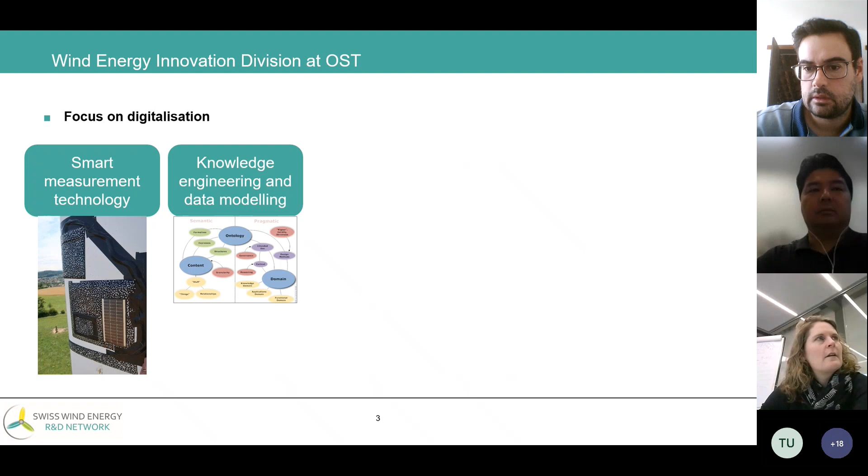And yeah, our main focus, as I said, is on topics of digitalization. So we do things like develop smart measurement technologies. This is a pressure measurement device that we develop. We do lots of work on knowledge engineering and data modeling, so how to structure data in a way that artificial intelligence can use it easily. And we then do lots of data analytics and AI. We have some projects on digital twins and decision support.

And then we're quite into the topic of data sharing and making data FAIR, which means findable, accessible, interoperable, and reusable. And we try to bring together people with data to solve problems. Our research has got to do with flow modeling in mountainous terrain. In Switzerland, we have lots of mountains.

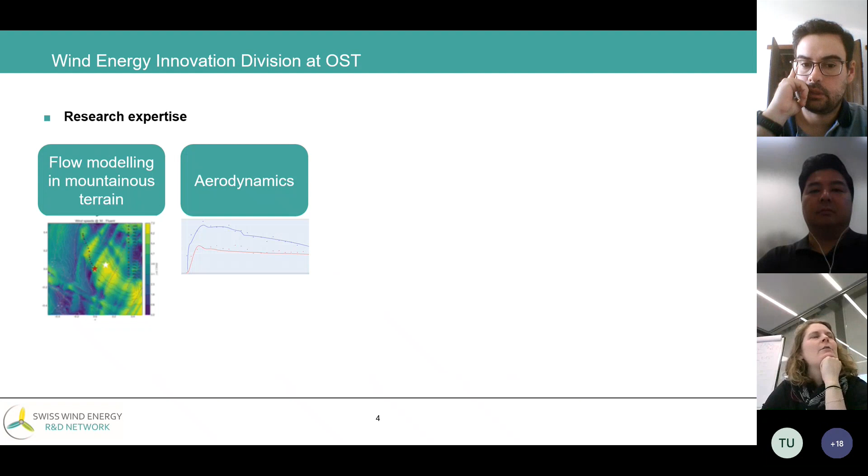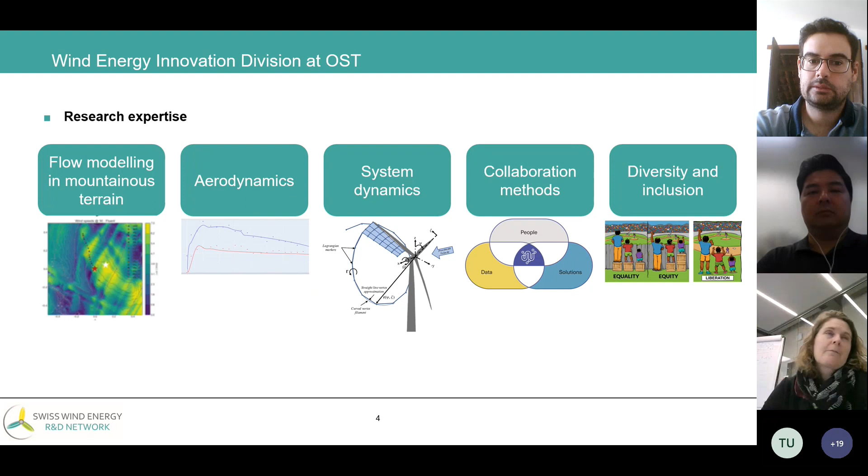We also look at rotor blade aerodynamics with our measurement systems. We've got some projects where we're looking at the dynamics of the whole system. Then we research into different collaboration methods, so a bit with social science, and then we have a diversity and inclusion topic as well, because it's important for us to include lots of different people in research.

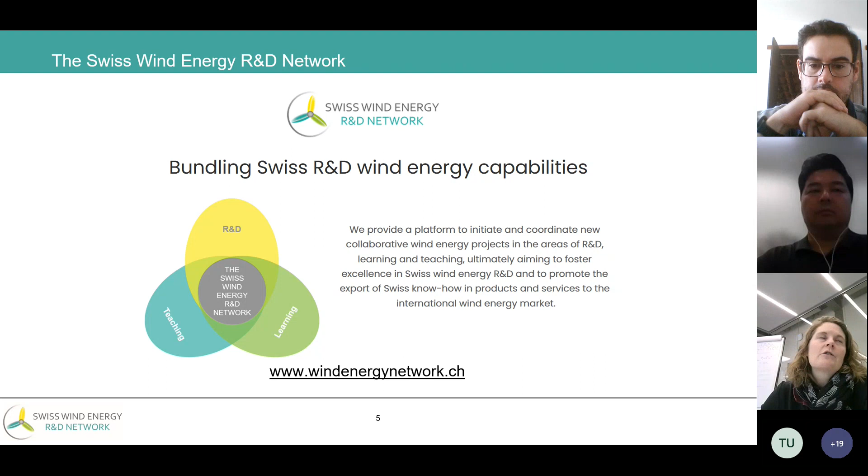And the Swiss Wind Energy R&D Network, you'll have seen that the invitation to this event came on our website. So we're trying to bundle Swiss research and development wind energy capabilities, but we're also trying to promote relationships and collaborations with other countries. So this whole thing with Brazil and doing this workshop is quite important to us, because Switzerland's quite keen on expanding its services to Brazil. And so we have quite a lot of companies who have innovative things that they do, which could be used for helping Brazil reach its offshore wind energy goals.

We have this project called WeDoWind, which is how this whole collaboration with Brazil started. And so WeDoWind is a method that we've developed for actually bringing people together with data and solutions. And on this picture, you can see we have this idea of challenges. So we have challenges like data science challenges where people provide data, like wind farm owner operators provide data, and then students and researchers and data scientists try to solve the problem.

And the reason that people take part is because the data providers, they're looking for new solutions, and the solution providers, they're desperately looking for data. So the idea is to do that all together. And this collaboration with Brazil actually started by thinking about what challenges we could do together.

So far, we've had 2 really interesting projects. One with a company called EDP in Portugal, who shared some data. We published this paper where we looked at different algorithms for fault detection. We did a second one with a company called WinJi in Switzerland. We've just submitted a paper learning about data sharing and about evaluation of different models. But then we've got 3-4 more running. So we have one with a company called Cubico in the UK. We're sharing some data.

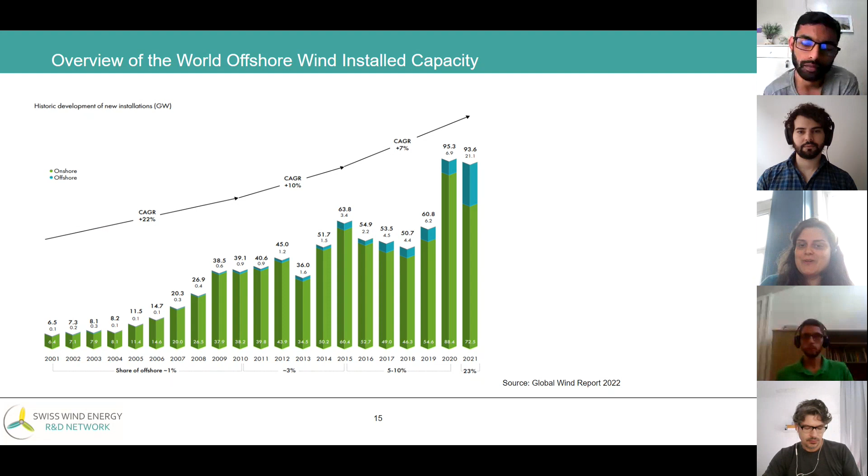The country with the most installed offshore wind capacity is the UK. After that is Germany. So Europe is a big leader in general, and also the United States has very ambitious plans to keep their goals, although it's not at a federal level as in most of the other countries. There are some states that really want to become more green. So we expect that maybe in 2030 they will have a huge percentage of the whole offshore wind installed in the world, and we hope that soon we also have some percentage in Brazil as well.

So I wanted to show you a little bit about the context of offshore wind, because I used to hear a lot in Brazil that, oh, this is a very distant reality, but you can see that this concept started in the 1930s, and in the 70s there was also another proposal. And if you look at this date, it's also a similar date to the development of offshore oil and gas. So they were combining this idea. And we had lots of energy crises. Here in Europe, the energy crisis is very high.

And for instance, in the UK, due to offshore wind, they can lower a little bit the cost of energy. Offshore wind is not that cheap, but the gas prices are really, really high because of the war, and probably because it's a commodity. The prices of all the oil products are very high everywhere, except if you have some subsidies, which is what's happening now in Brazil. So this is a way of developing those kinds of technologies, to invest more in them.

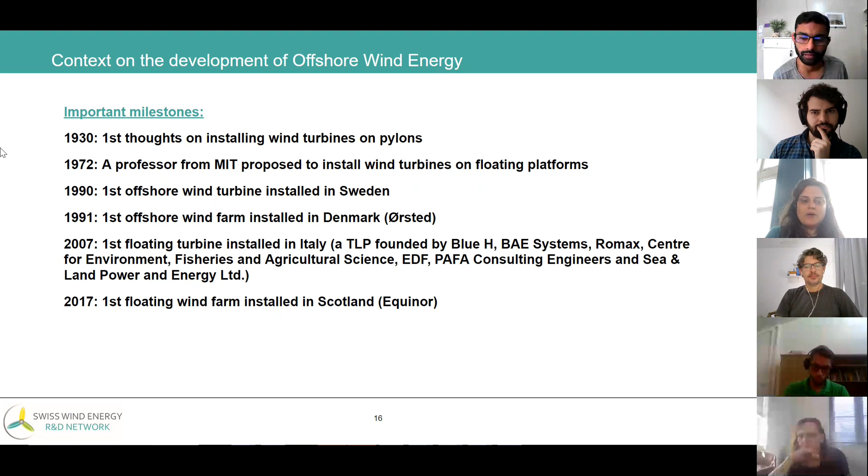Okay, so I believe here are some lessons learned, and there might also be some of the advantages that we have in offshore wind, because if we have a look at the project Vindeby, it was very close to the shore. And one of the first ideas of installing in the sea was to save space on land, especially in Denmark or in the Netherlands. But developing offshore wind, we could also see some very interesting outcomes. Winds are usually stronger and more uniform at sea. The turbines that we can install in the sea are more powerful. They can also be bigger.

We also have some logistics challenges. But for instance, when we're installing an onshore wind farm, we also need to take into consideration the roads, because sometimes they are very remote places. And for offshore wind, we can have the supply chain developed close to the ports or to the construction yards. And then the logistics, of course, will be a little bit different and sometimes challenging when you're doing the installation. But we always have to remember that the naval industry already knows how to solve those problems, especially because of the oil and gas industry.

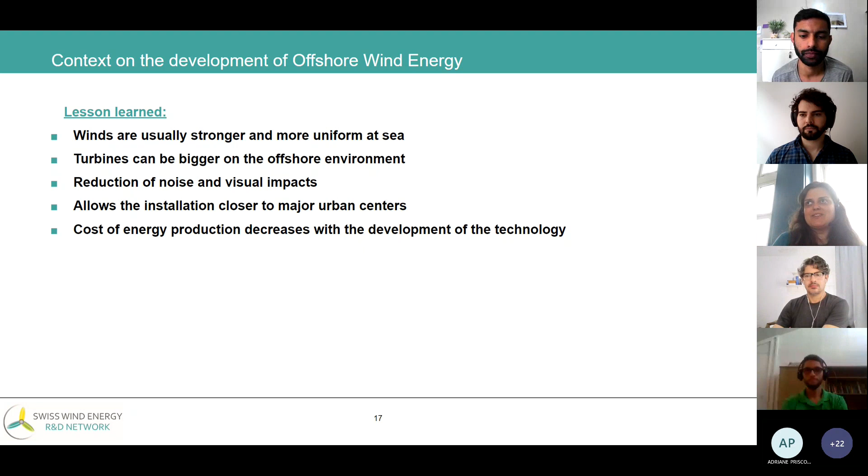As I mentioned with the UK, another lesson for everything in technology is that the more we develop something, the cost ends up decreasing. This is the case for offshore wind. Costs at the beginning were very high, but with some subsidies and the lessons learned, we are building more efficient projects. Although it's expected that project costs might be a little higher now, these cost increases aren't only for offshore or wind energy - it's for everything in the world because of energy prices and also steel problems or magnets and rare earth. But that's another topic we might talk about on Friday when we discuss more challenges.

So lots of people, maybe 5 or 6 years ago, used to say: why are we going to develop offshore wind energy in Brazil if our country is so big and we still have lots of space to develop onshore wind? But Brazil really has lots of possibilities, even for non-renewable and also renewable energy. We have a very big sea area - about 2/3 of our land portion. We also have excellent wind resources, both onshore and offshore, especially in the Northeast region. And we have a very big estimated theoretical potential - it's really, really high, almost 10 times.

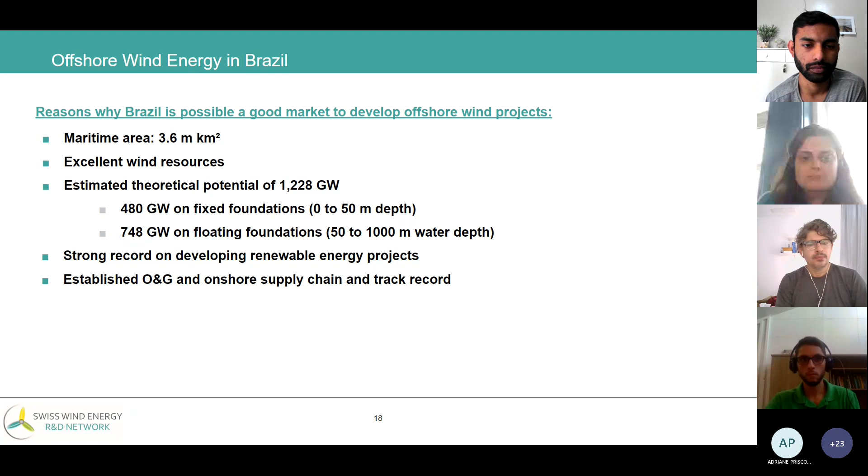Well, guys, unfortunately the table is not updated, but when I send the file to you, you'll see it all updated.

Of course, most of them have some overlapping, but we can see some players like CIP, which is a company from Denmark, Shell, Total Energies from Europe, and Ocean Energy, Ocean Winds, which also have a very big interest in developing the market in Brazil.

We see Corio Generation, a company that has lots of projects in Asia and also some in the UK. We see Iberdrola, which is also a good leader of the market.

All of those projects, of course, have overlapping, but their capacity is about 170 gigawatts, which is the capacity that our network has of installed capacity.

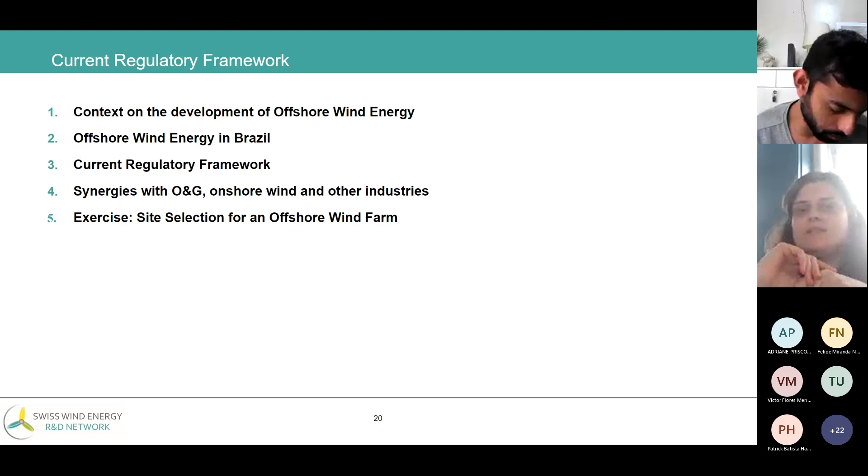I believe there are some case studies here in the North Sea that they are considering when they do the decommissioning of the old oil and gas platforms. Of course, they will try to remove as much as possible, maybe the dismantling will be 100% or not, so they can feed the energy that they will need. Because if you don't dismantle everything, you still need some pumps to pump the oil with water, which is mainly water in this case. So you can install an offshore wind turbine to use this energy, or you can also use this structure as a hydrogen hub if the resources in that region are very good, and they might allow you to install a park now.

So I think actually it was faster than I expected, and I want to know, guys, if you have any questions about it.

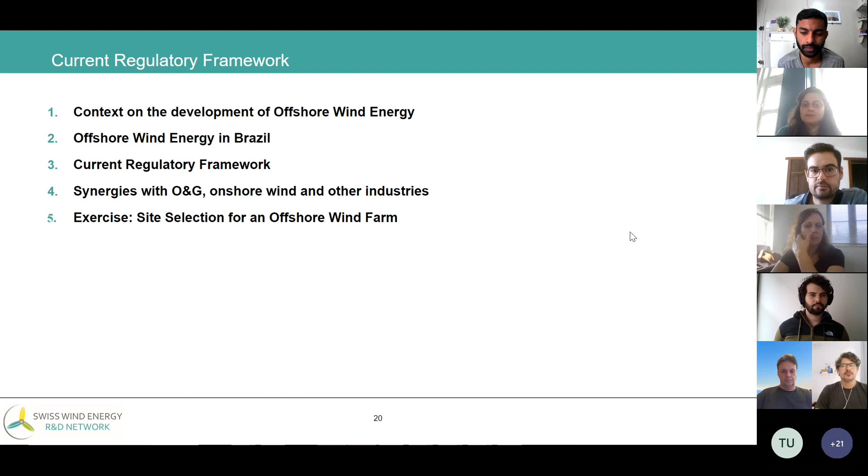And we always need to remember that in the case of Brazil, if we see the map... sorry, it is not this map, unfortunately it is very small. It's not close to big centers, and sometimes it's not even close to places where we might have a very strong industry. So we need to remember that those people are very simple. They might not even know what a wind turbine is if they have never seen it. So you really need to explain it.

You really need to point things out, and you need to know how to negotiate it. One thing is, depending on where you are, it might be a little bit more easy to convince people, but we don't know. Maybe in those cases, the competition is also really, really big. Even the developers might have problems, and it's not only a problem with society.

Even the other stakeholders, like the oil and gas industry, they might feel, oh, this is not interesting to develop here. In the south we have some coal power plants, which is very different from the rest of Brazil. And the south is the place where we might have more projects. Are those stakeholders of the coal industry happy? Will they try to stop the progress? This might happen, this is the thing.

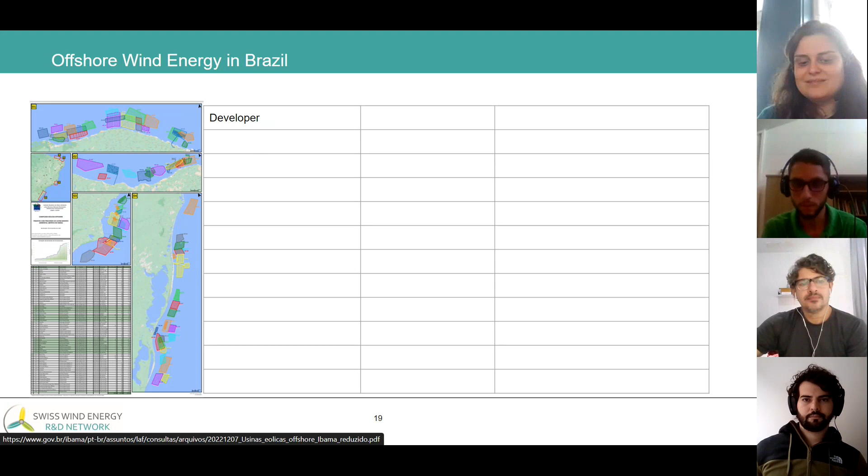My name is Cesar. I'm doing my doctorate at the Federal University of Santa Catarina. My thesis is about detecting faults in permanent magnet generators. But I was studying another article these days, and I have some questions. How can we accomplish some requirements to bring such technologies to Brazil? I'm talking about the vessels. We have special ships to transport and install superstructures or substructures of wind turbines. So how can we bring such specific vessels to realize such transportation and installation in Brazil?

Yes. Well, those vessels are a huge problem for the industry, because we have so many issues related to the workforce and also the supply chain. I don't know if we have more than three companies. At least we have three very famous ones: Boskalis, Jan De Nul, and also DEME. Maybe there's another company as well, but right now I can only think of three. And all of those vessels are sometimes adapted from other vessels of the oil and gas industry, or they're building brand new ones, but it takes time.

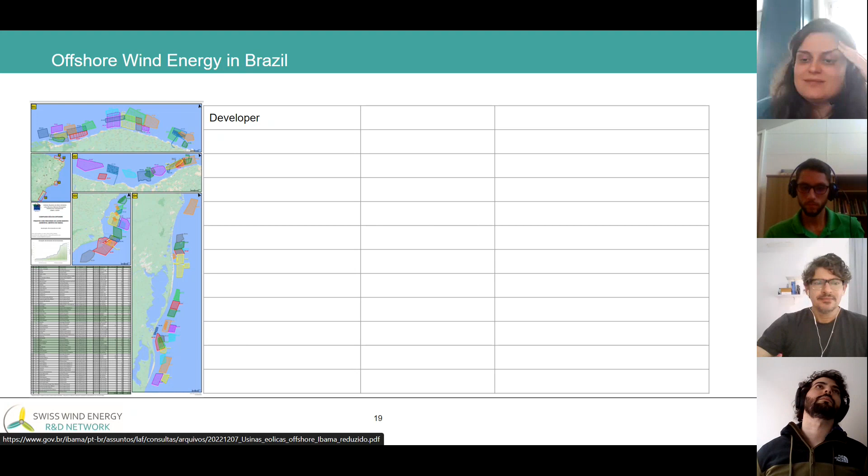Okay, thank you, Adriane. Anytime. So any other question? Let me see if I can send a message to Sarah.

I don't know if I can call Sarah for her to open the breakout rooms. I remember she said you could call her using the chat. Yeah, but I'm trying to send her a message in the chat. Because I think I'm an outsider from the company, from her institution. I'll drop her an email asking her to come back. Don't you have contact by WhatsApp? No.

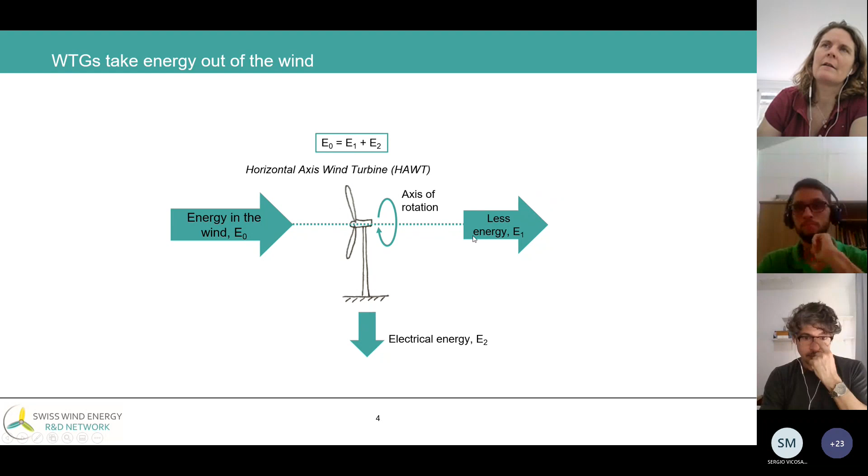And it's called a horizontal axis wind turbine because the axis of rotation is horizontal. And somehow this wind turbine converts some of the energy to electrical energy, but it doesn't convert all of it, right? So it's going to be impossible for us to convert all the energy in this wind to electrical energy. And so some of the energy keeps going in the wind behind the wind turbine, but you just have less energy behind. So this area behind the wind turbine is the wake, and you'll have a lecture about wakes on Thursday. But generally you have less energy in the wake because you're taking energy away.

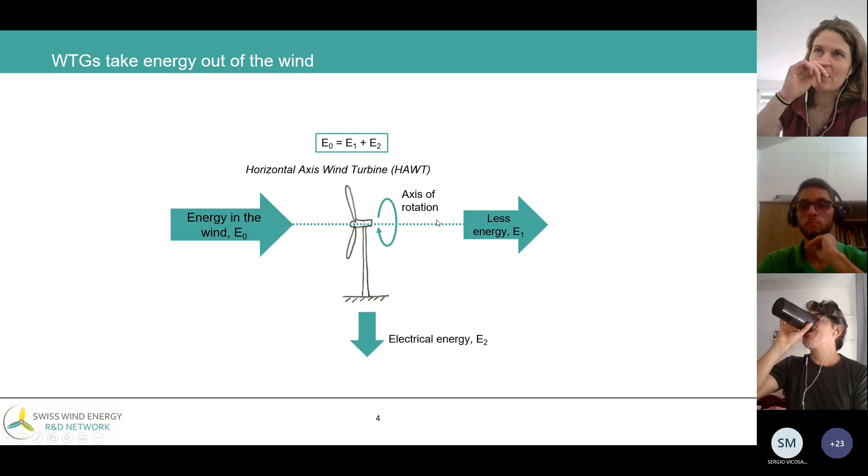You do actually have some rotational energy added, but basically you get loss behind the wind turbine. So the total energy in the wind is a sum of the energy that you have behind the turbine plus the electrical energy which you take out.

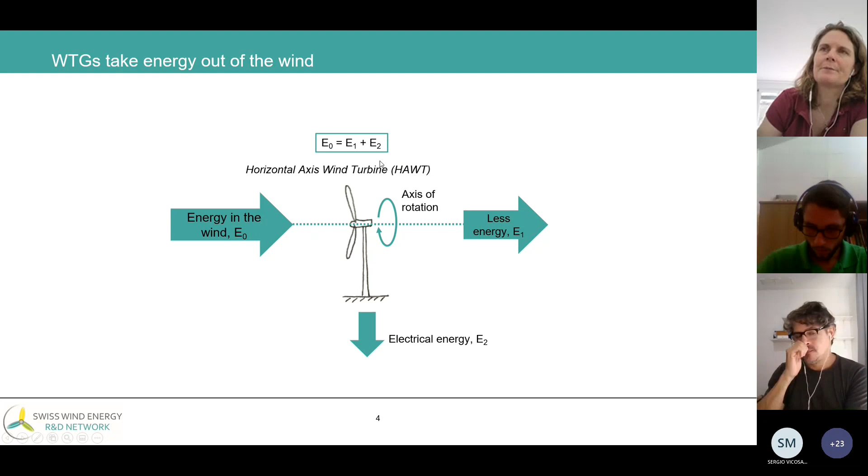And you may have seen some different types of horizontal axis wind turbine before. The most common one is just this three-bladed. There are some strange designs as well, where people try to build a large number of blades. We'll talk about the number of blades as well later. In northern Germany, there are some two-bladed wind turbines as well. We'll talk about that.

And then this is kind of what the components look like in a wind turbine. If anyone's been into a wind turbine, you'll know that it doesn't look anything like this picture here at all. It actually looks like a very big room with these very big components inside. Usually you can stand up inside here. So you have the blades and the hub, which is this bit at the front, which make up the rotor, the rotational part, and that's attached to the shaft. You have a bearing as well, which is holding the shaft but letting it rotate.

And then usually you have a gearbox, which speeds up the rotation because the rotation is much slower than the mains frequency that the generator needs. We'll talk about that a little bit later. And at the end of the day, you're then putting this electricity, which is created in this generator, into the grid. You have the nacelle, which is basically the big box around everything. And then you have the tower. And then at the bottom, you have the foundation.

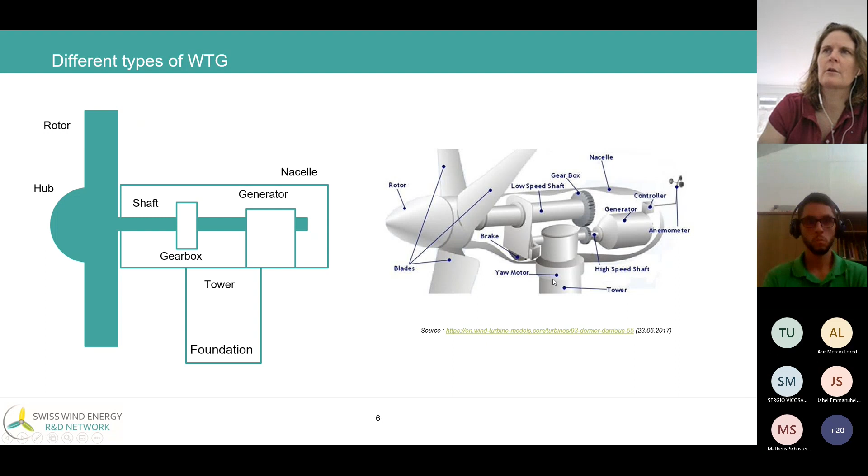Some important things to know about wind energy. So one thing is that the power available in the wind is proportional to the cube of the wind speed, and it's proportional to the area that the blades cover. The reason why this is so important is because it basically means you need high wind speeds if you want to get a decent amount of power production, but you also need to be as big as possible.

One of the mistakes that people make, for example, where I am in Switzerland, there's many urban regions which have low wind speeds. So people want to install small wind turbines. And I try to explain to them with this equation, if you're in an area where you have low wind speed, the power available is going to be tiny. Therefore, you need a big area. If you have low wind speed, you need a really, really big wind turbine. So small wind turbines only really work if you have very high wind speeds. And the rho is the air density.

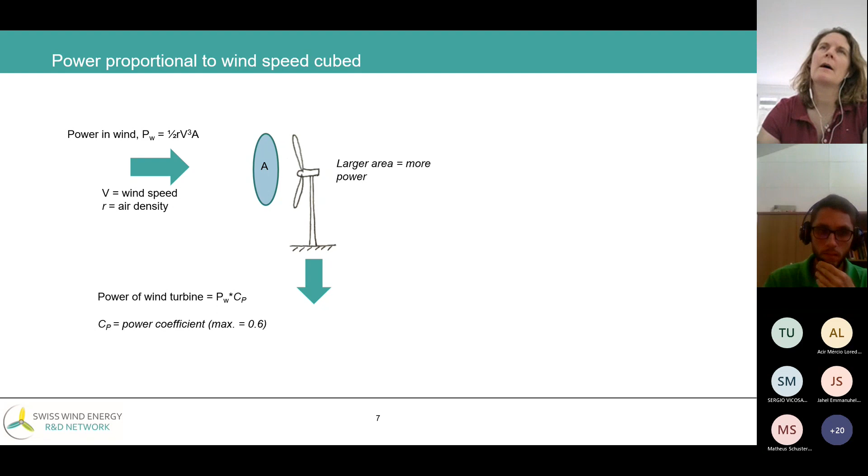But as we said, we don't take the entire power from the wind into electricity. We convert a certain proportion, and the proportion that we convert is known as the power coefficient, which is just the power of the wind turbine divided by the power available in the wind. That has a physical maximum of 60% or 59%, which is called the Betz limit, which we'll talk about later, but also in the lecture tomorrow.

If you just plot this equation, P is half rho V cubed A, we have power on the y-axis and wind speed on the x. You just get this big exponential curve. And if you just multiply that by CP, which is maximum 0.6, but usually a bit lower, you then get a second curve. And these curves we're going to use later.

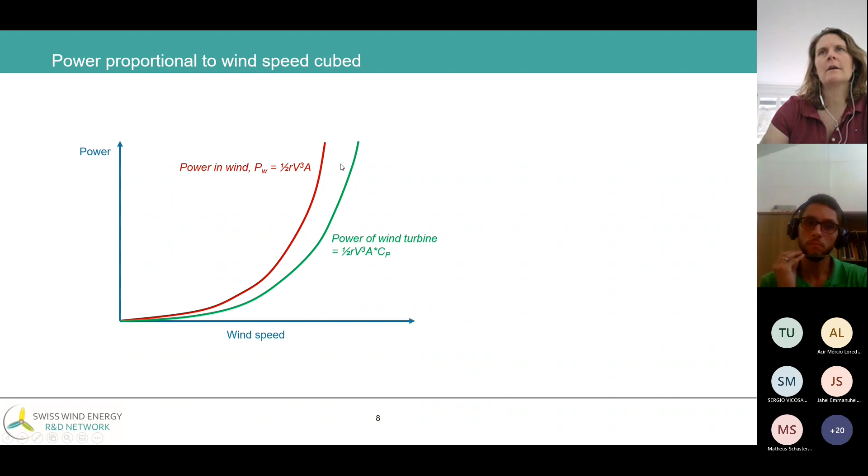But this has a significance for wind energy, because first of all, it means you just want to build as high as possible so you get a high wind speed. But it also means that you want to choose an area where this profile is rather flat, because if it's a steep profile, it means that if you imagine the blades turning, the blade at the bottom is going to see a much lower wind speed than the one at the top, which is then going to lead to a high dynamic loading, which then leads to more fatigue. So for example, offshore, you have a much flatter profile, which is one of the attractive things about offshore as well, apart from the fact that the wind speeds are just generally very high.

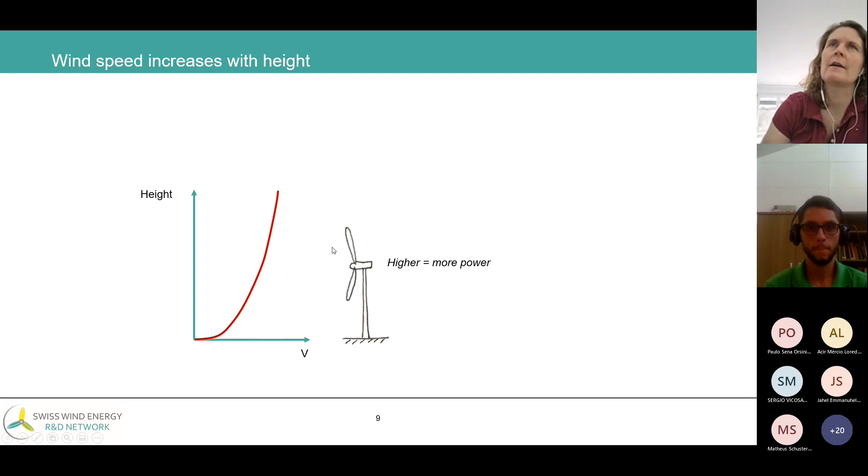Just about the wind quickly. I don't know if you know, but the wind comes from the sun actually. So the sun heats the Earth's surface differently depending on the land cover, so desert, forest, mountains, or sea, and depending on the time of day. And you get differences in air temperature, and then you get convection, which is just air of different temperatures moving around. You also have the rotation of the Earth, which creates these Coriolis forces, and it just leads to a very complicated global wind system.

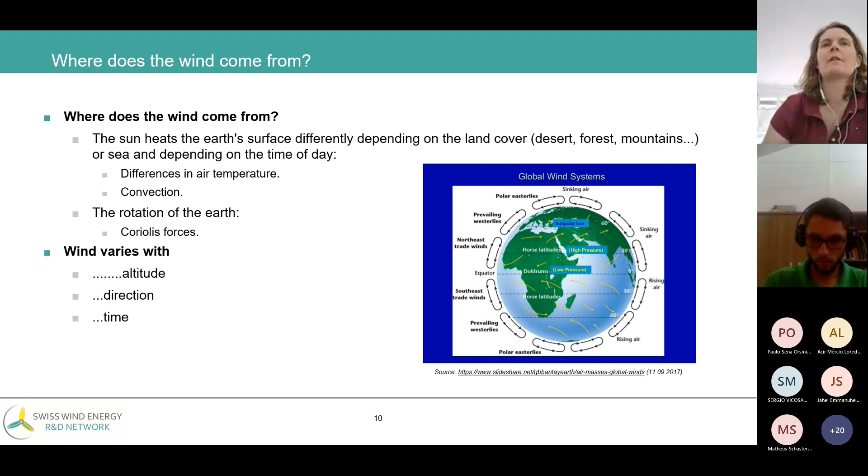And if you have a wind turbine, the wind turbine's experiencing all these changes. So the wind's changing with height above the ground and with altitude. Generally, it's changing with direction, and it's changing with time. So I've got a little diagram here showing these changes. So the top left picture is just showing, imagine you have a wind measurement device in the wind, and you're just recording the wind speed every second.

It kind of goes up and down, and you can take an average over a day or a week or a year. And on the top right, we're then showing a frequency distribution. So a frequency distribution is you're adding how often you get each wind speed. So you may know, for example, that the weight of people in Europe follows a normal distribution, right? Which means if you count how many people weigh 50 to 55 kilograms and how many from 55 to 60, and you divide it up into classes, you get this distribution where in the middle, where you have the mean, you have the most number of people, and then you have less people towards the edges.

And the wind speed is similar. You can count how often you have wind at different speeds, and you can create a frequency distribution. And usually the wind speeds approximate a so-called Weibull distribution, which is similar to a normal distribution, but it's parameterized by two numbers. And this is very important. We use this a lot when we're trying to predict energy, which we're going to do in the exercise later.

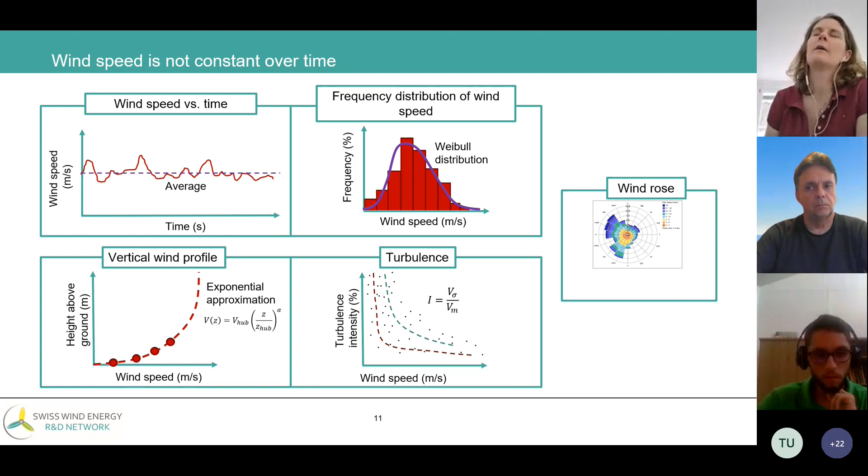And then the wind rose is showing the variation of wind speed with direction. This is important because, well, the wind turbine is moving to line up with the wind so that it can get the maximum amount of power out of the wind. But if you think of a wind farm which has got lots of wind turbines, you want to avoid them having a large effect on each other. If you put them too close to each other, they won't see as much wind. The wind speed they see will be lower, and the loading will be higher. So you want to distribute them so they don't affect each other too much.

But the wind direction is very important for this, because depending on the wind direction, the wakes of the wind turbines are going to be pointing in different directions. But Raphael will talk much more about that on Thursday.

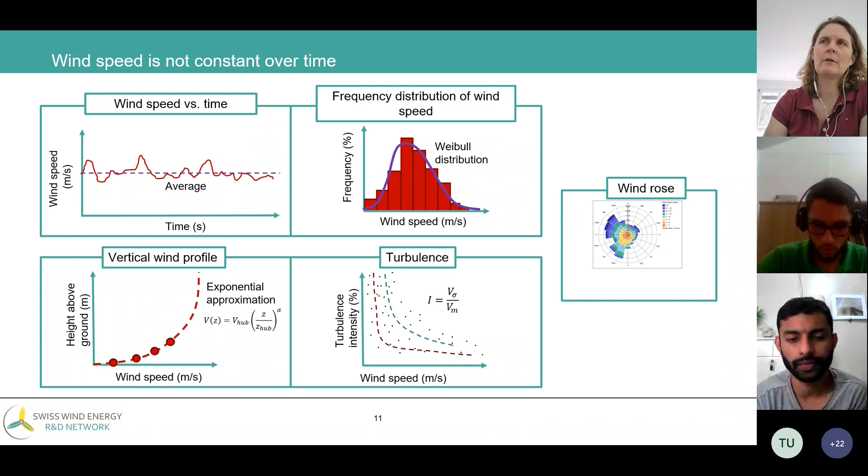And then to the topic of different wind turbine concepts. Or can I maybe ask if there are any questions on that first part yet? So that was basically just a first introduction, a couple of important concepts in wind energy. Is there something about that that's not understandable or that needs clarifying before I continue? No questions to me. All right, thank you.

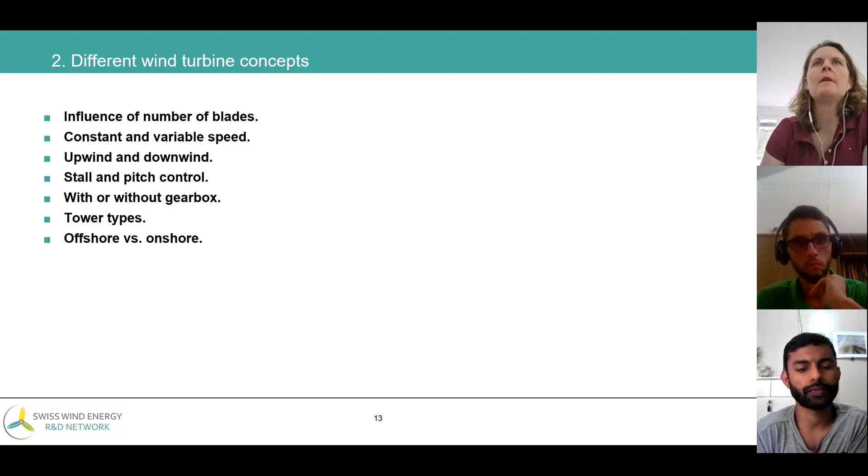Okay, so I'll continue to talk about a few different concepts. I'm going to go through all these different concepts now and compare them. So the first thing is about the number of blades, which I already mentioned. Maybe some of you know that the power of a rotating machine is equal to the rotational speed multiplied by the torque. So for the same amount of power, if you have a high torque, you have a low rotational speed, and if you have a low torque, you have a high rotational speed.

And what we want when we're producing electricity is a high rotational speed, because at the end of the day, we're putting our electricity into a grid which needs 50 hertz, or depending on what country you're in, something around 50 hertz, which is very high speed. A wind turbine with 3 blades, for example, rotates at like one hertz or even half a hertz. So the slower you're rotating in the rotor, the bigger the gearbox needs to be. And the gearbox is a very sensitive, large, unreliable part of a wind turbine.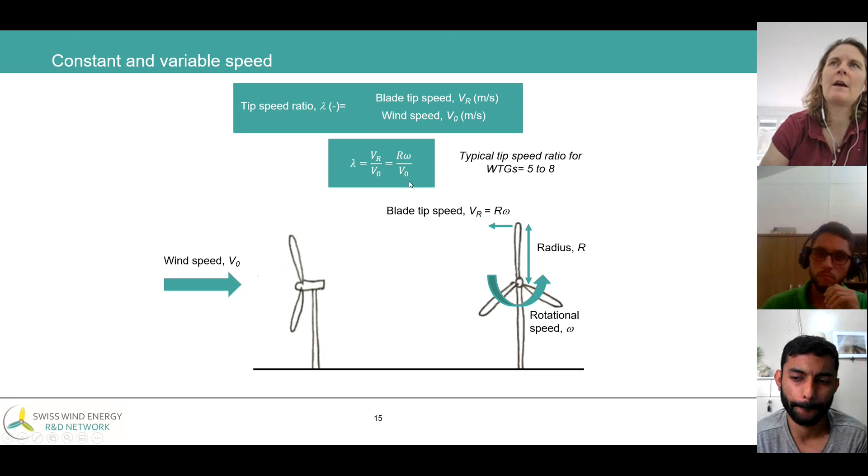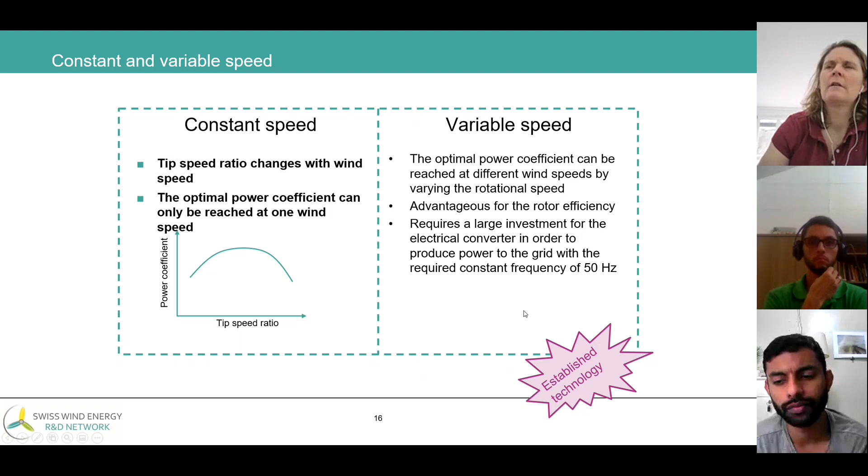But now imagine that the wind speed is changing while you have a constant speed rotation. Every time the wind speed changes, you slide down this curve and get a lower performance. So with a variable speed wind turbine, you use a frequency converter in the generator to alter the rotational speed. You measure the wind speed and alter the rotational speed so the tip speed ratio stays the same, keeping you at maximum power coefficient. That's why large wind turbines are all variable speed. Does that make sense?

Yes. Then there's this thing called upwind and downwind, which isn't that commonly known. Most wind turbines are actually upwind, meaning the rotor is upwind of the tower. If the wind is coming from left to right, the first thing the wind turbine sees is the rotor.

But the other thing you can do is turn the wind turbine around and have it operate this way, which means you avoid the tower being hit. The other advantage is that you don't need active yaw control. If the aerodynamic center of the wind turbine is behind the rotational axis, it actually means it lines itself up with the wind.

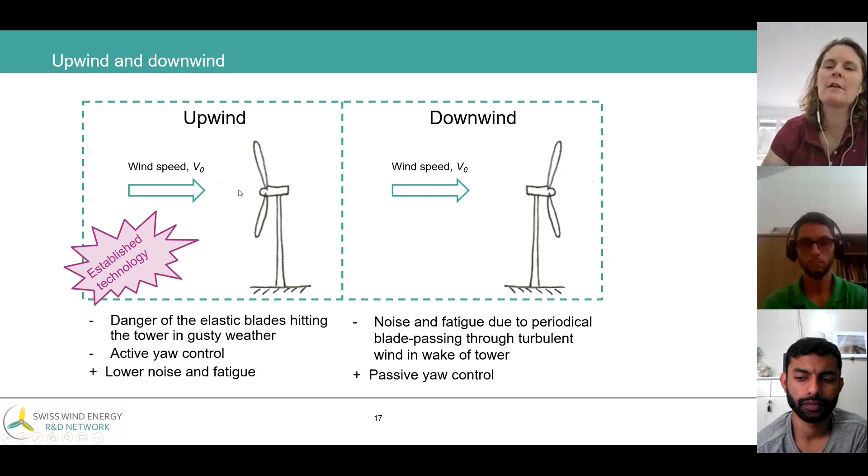That was one of the reasons why some small wind turbines have this downwind construction, just to avoid having to have yaw control. But it's not great because you're going through the wake of the tower every rotation, increasing the loading. Still, some companies are looking at large scale downwind wind turbines because of these advantages, but the established technology is upwind.

Now we need to limit the power of the wind turbine because wind speeds higher than around 12 meters per second don't happen very often. If you imagine a generator that could deliver power at these high wind speeds, it doesn't warrant the extra cost. If I'm going to buy a wind turbine with an 8 megawatt generator, it's going to cost at least 4 times more than a 2 megawatt generator, even more.

So I'm using the power here, but imagine I never have any wind above 12 meters per second because of my variable frequency distribution - then I'm paying 4 times more money but not getting any more electricity at all.

And even if you have wind like a few days in a year at those high wind speeds, what you're gaining is much less than what you're paying extra. So there's some compromise that has to be made between increasing electricity production in the small amounts of time with high wind speeds and the extra costs.

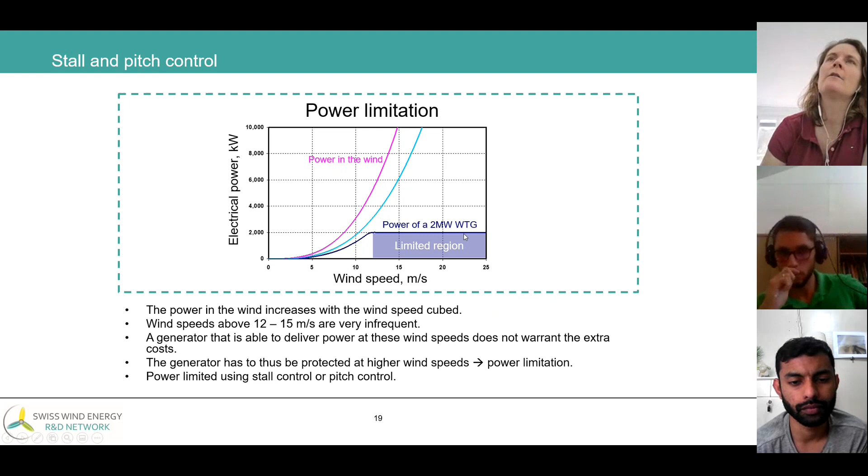The way you do that - the old-fashioned way - was called stall control. We'll look at the aerodynamics tomorrow, but the air flowing over the blade creates the lift, which creates the torque on the rotor. In order to create lift, you have to have a smooth flow, like on an airplane going over the wing.

At some point, if the angle between the airflow and the blade becomes too high, you get flow separation, which means the flow is now separated from the blade, and lift is not being produced anymore, so the lift forces are reduced. Aeroplanes can crash due to this, but a wind turbine then actually stops creating power.

This can actually be used cleverly by designing the blade so that once the wind speed gets to a certain value, like 12 meters per second, it stalls on purpose, which reduces the power. It's a cool concept, but it's not easy to control because the stall is very dependent on things like how dirty the blade is, or even the air density, which is always changing. So it's not great to control.

So there's this thing called pitch control, which involves the blades having a motor in the base, and the angle gets controlled. That is really easy and very accurate, so the control system knows what angle the blade needs to be set at, at a certain speed.

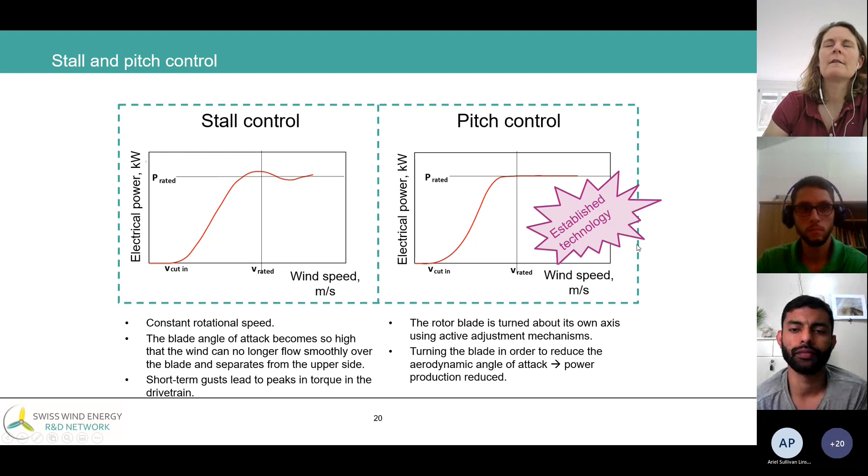In order to reduce the performance of the wind turbine on purpose, it's built to do that actively, so it can check if the power is too high. It has a general rule based on expected behavior, but it can adjust to keep the power at the right value. That's what most wind turbines have, but you need a motor and a control system, so old-fashioned or small wind turbines might not have that, because it's some effort.

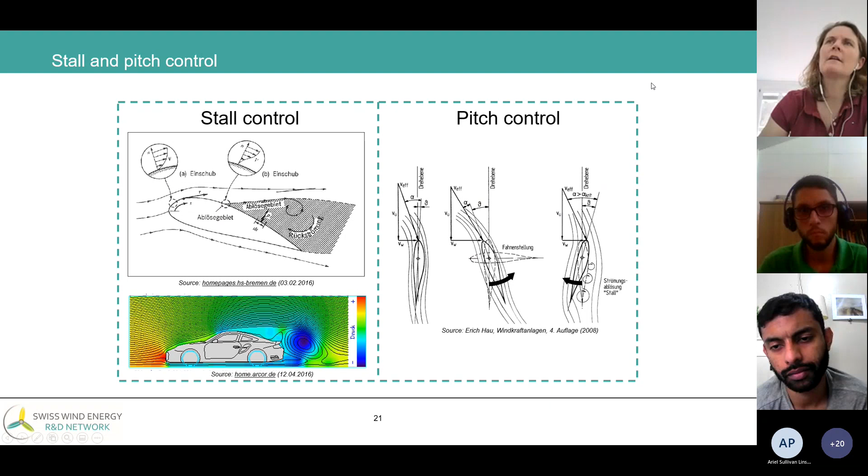Yeah, and then the gearbox. So we talked a little bit about the gearbox, and the fact that the generator's got to move much quicker, rotate much quicker than the rotor. So the transmission ratio of the gearbox is the generator speed divided by the rotor speed.

And the generator speed is actually given by the mains frequency divided by the number of pole pairs. In Europe, the mains frequency is 50 hertz, and the standard number of poles is 2 pairs, which makes 4. Using that information, you can work out what your transmission ratio should be.

Wind turbine gearboxes have a constant transmission ratio, they don't have variable transmission - that's too complicated and expensive. So the change in rotational speed is done with the frequency converter, which I'm sure Victor will tell you about on Wednesday. This slide isn't quite accurate anymore, because there are quite a few solutions between now, but there are two extremes.

You either have a standard four-pole generator, which is cheap, combined with a very large, expensive, unreliable gearbox, or on the other side, some designs have no gearbox, but instead a massive, very expensive, self-developed generator. Enercon were the pioneers of this, a German company.

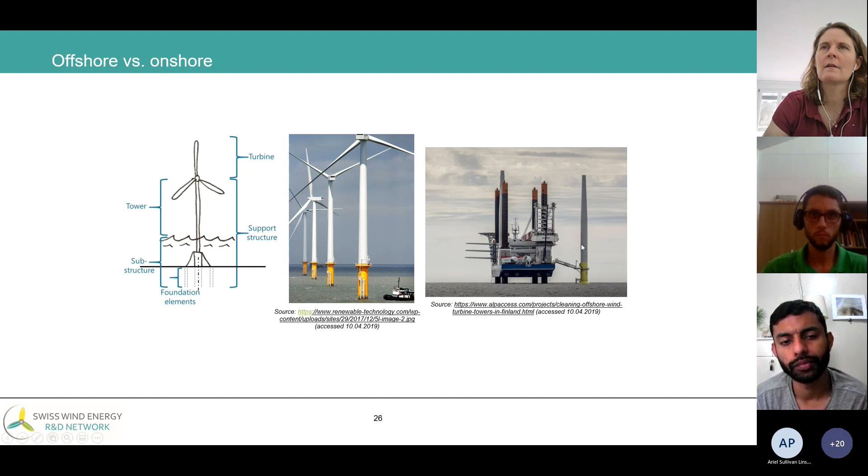And then, going on the topic of offshore, which is obviously important for you in Brazil, offshore is more complicated because you have to consider this whole support structure in the water as well. Then you've got all the logistics, which are much more difficult if you're trying to build these big things in the water. The reason that people go offshore is because of much higher wind speeds offshore, but also they're much more constant over time. But also this profile is steeper with the height, which makes the loading lower.

I'm just going to quickly get a glass of water. I'm sorry, I'm getting a dry throat. I'll be back in 2 seconds.

Okay, and then one of the disadvantages of offshore is just that you have to somehow design this big foundation or the support structure. And then you imagine the loading on the wind turbines. You have waves and wind, which you have to model, and they all interact with each other. And I think that's quite a big challenge as well. Then you have the marine environment. So you have the salt, and you have the humidity, and you have the animals living there.

And then the whole topic of logistics is a big thing. Also, by the way, monitoring is difficult, right? You can't just send someone out very easily to look at what's happening to the wind turbines.

Hi. If there is a steeper wind profile, wouldn't there be more variation for the case of offshore? No, because what I mean with steeper is, let me just do a quick drawing for you. I've actually got a touch screen, so I can draw on my screen, but I can only do it on the screen that I'm not sharing. So I'm just going to do a picture, and then I'll share it with you in a second.

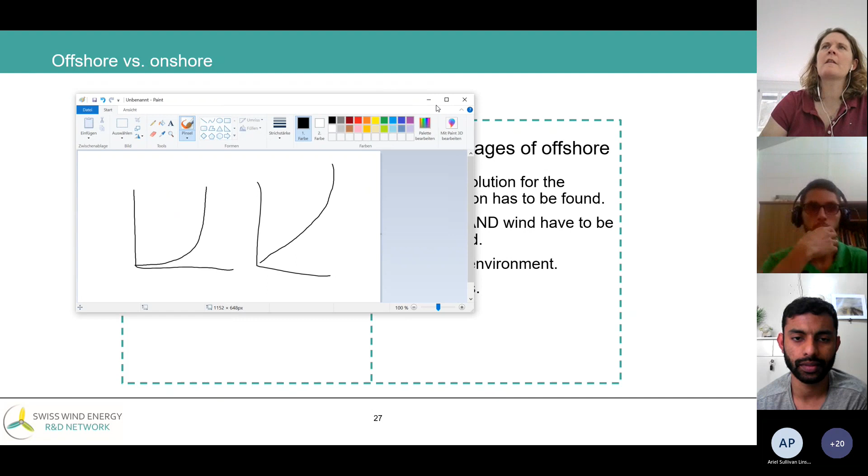So it's just that the definition of steep is the opposite of what you think it is. So my definition of a steep wind profile would be the one on the left and not the one on the right. So steep means it changes near the ground. So on the one on the left, the wind speed is on the x-axis and the height is on the y-axis. And so the wind speed is changing within a very small amount of height to a constant value, which means if you have a wind turbine up here, it sees a constant, like it's flat here.

Whereas a non-steep profile would mean that it takes a long time to get to the maximum, and then the wind turbine would be in that changing range. So it's just actually a definition of what steep means. Okay, it's just the other way around to what you were thinking, probably. Does that answer your question? Yeah, thanks. Okay. Maybe I should reconsider if I actually call it steep. But yeah, anyway.

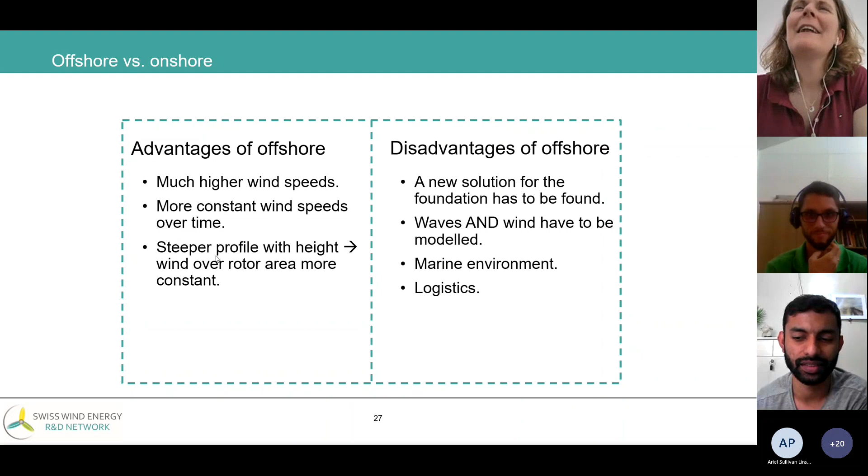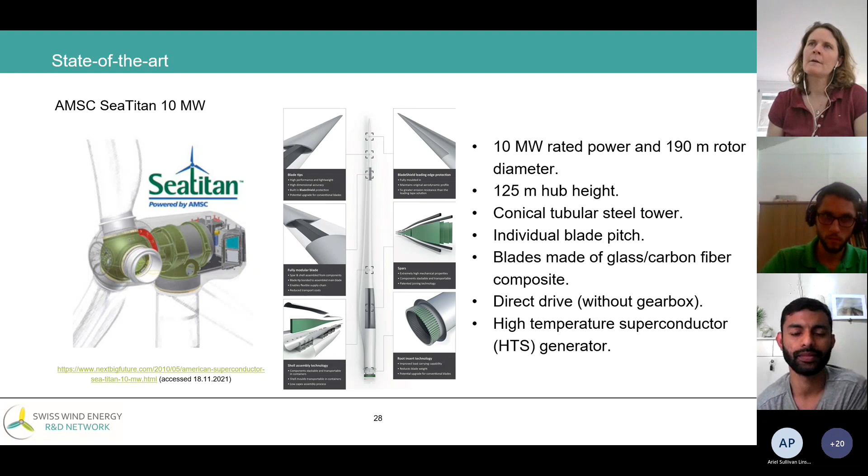And then this is not the biggest wind turbine in the world, but it's the biggest commercial. It's not the biggest power, but it's the biggest commercially available in terms of the rotor diameter and blade length. It's 10 megawatt rated power with 190 meters rotor diameter, 125 meters hub height. And there's also this prototype made by GE called the Haliade, which is 12 megawatts, and it's got a 220 meter rotor.

I actually forgot to add, there's another one. There's actually a bigger prototype built by Vestas now, which is like 15 megawatts. But actually, if you look at the dimensions, it's not actually bigger. They just put a bigger generator on it and pretended it was bigger.

I mean, the blades are not bigger. Anyway, so I put some links in here. I'm going to share the slides with you, and you can see the links yourself, so you can get a feeling of how big these wind turbines are.

Okay, and that was part 2. So I want to go to part 3, where I talk about power and energy, if there are no more questions.

Hey, Sarah, I have a question for you. I think there is a trend to use direct drive wind turbines. Yeah. And I would like to know how many poles are present in those permanent magnet generators. Do you know this information? Yeah. I mean, I don't know 100%, but what I do know is that if you look at this equation, you can work it out actually.

If you know, like, a transmission ratio can be 50 to 100 depending on the size of the wind turbine. But if you did have a 1 to 50 transmission ratio, which you're basically replacing with a direct drive, you need to get that 1 to 50 translation in the generator. So you need 50 times 4 poles, right? So you need 200 poles.

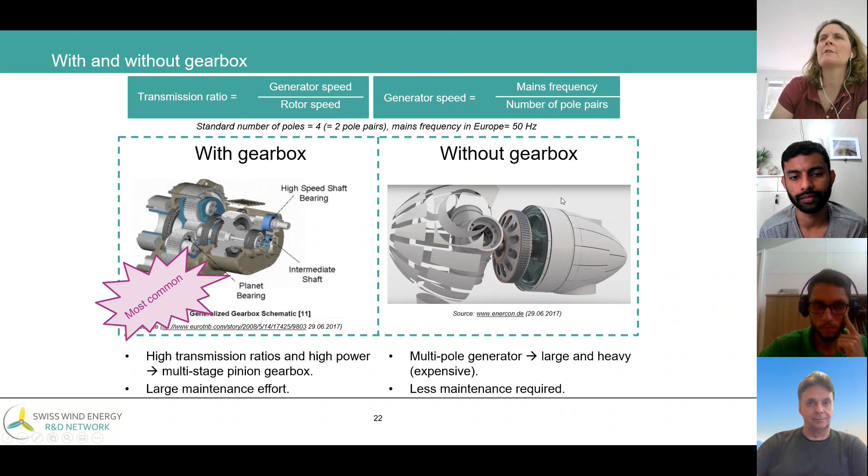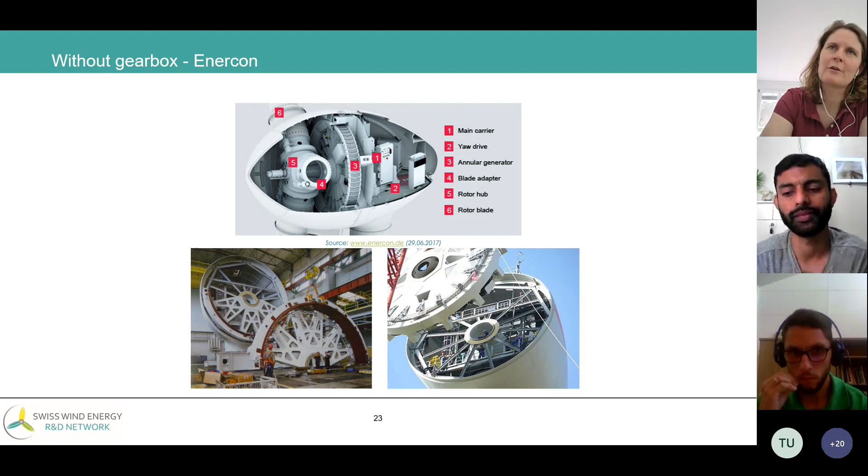They're massive things. I mean, these ones are actually not permanent. The Enercon ones are not permanent magnet ones. They're, what's it called? I can't remember what it's called in English. Electrically, yeah, thank you. Yeah, electrically excited. But there are these ring generators as well, which are the permanent magnet ones, and they're pretty ridiculously big. And there's also this question about the heavy metals used for that as well, which is not necessarily good.

But that's what I'm saying. I think quite a lot of the current solutions have this hybrid thing where they, maybe not this one, have a medium size. They do have a gearbox, but a medium gearbox with a medium generator to compensate. It doesn't have a massive unreliable gearbox, but it also doesn't have a ridiculously heavy, massive 200 pole generator. It kind of compromises on both. But yeah, Victor, I'm sure, will tell you more about that. Okay. Thank you. No problem.

So moving on, I'm just trying to work out if I'm going to tell you all of this because we're kind of running out of time. I'm going to just continue and talk about the job of the rotor. So the rotor is converting energy to rotational energy of the shaft, right? So it's the first thing that the wind sees, which makes it pretty important. And we've said before that the rotor actually wants to rotate as fast as possible to be efficient.

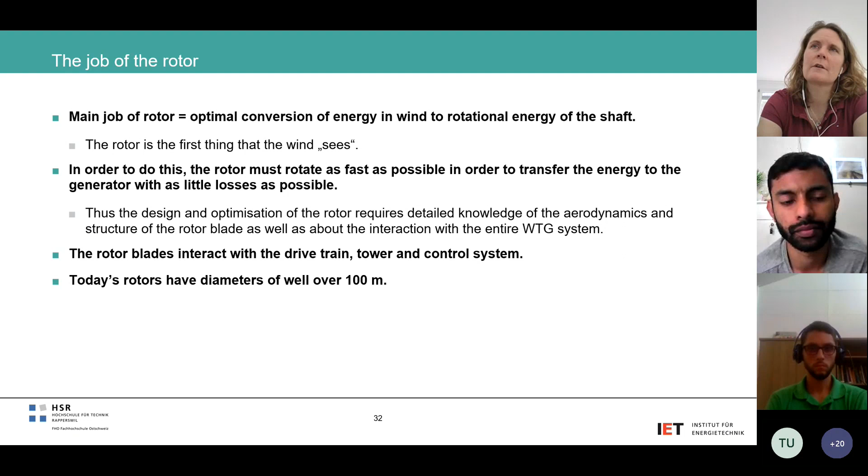So if you're designing the rotor, you need quite a lot of knowledge about the aerodynamics, but also about the structures. And then the interaction with the entire system is important, when you're, for example, trying to avoid resonant frequencies. But you're going to hear more about that tomorrow. What I'm going to do is talk a little bit more at a global level. I know this might be really basic for some of you, but it's really important in wind energy, and I'll explain why.

So energy, according to the standard units, is measured in joules, right? A joule is a watt second. But energy can also be measured in kilowatt hours, which is standard for electricity generation. A kilowatt hour is a kilowatt multiplied by an hour. So it's just a different unit, but it's still energy. And the power in kilowatts is just the energy divided by the time.

And actually the rated power of a wind turbine is really not very important. What's important is how well the power curve matches the wind conditions to get the optimal energy production.

So the energy in a stream tube is given generally by the mass of the flow divided by 2 times the speed squared. That's just the kinetic energy law. And then because the power is the energy over time, this dot, if you're not familiar with it, just means variation with time. The power is the variation of the energy over time.

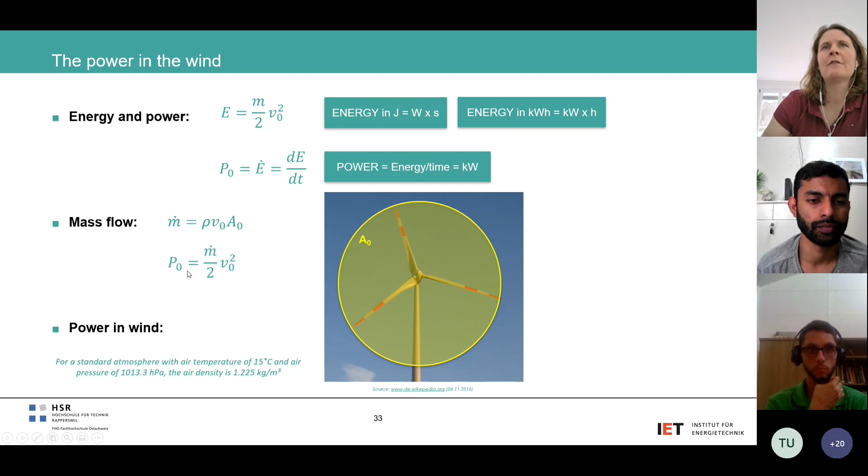And we also know from basic physics that the mass flow of a certain volume of air or fluid is the density times the speed times the area. I'm not going to derive that, that's just how it is. And then if you put this m dot into these 2 equations above, you get that the power is m dot divided by 2 times v squared. And then therefore the power in the wind is rho divided by 2 times v cubed A. And that's basically why you have this formula I told you about before.

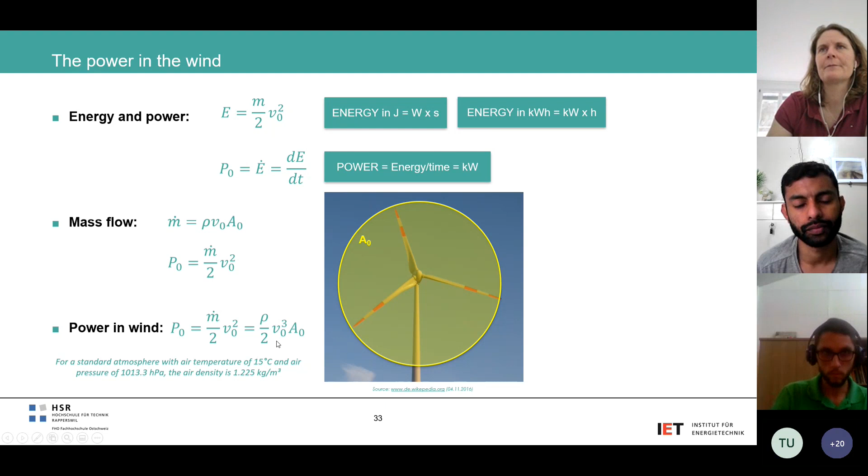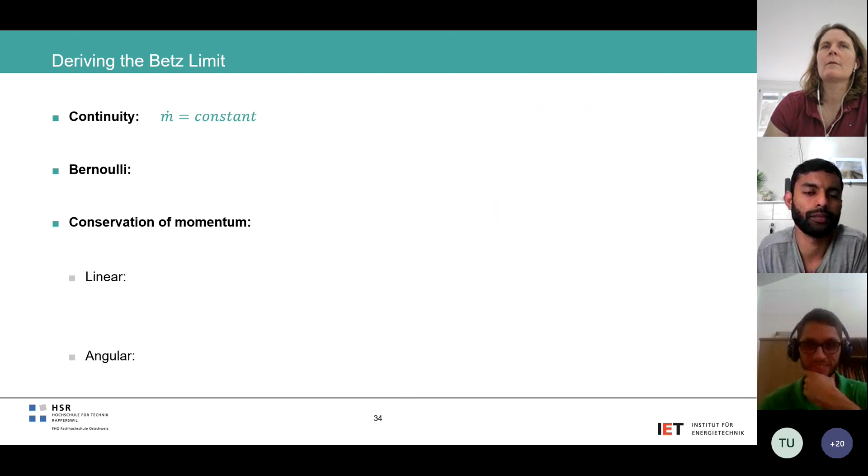And then you can derive this thing called the Betz limit, which is this maximum 60%, which I told you about. We're not going to go over it in detail. Actually, I'm going to kind of skip over this. I'm just going to tell you roughly how it's done. So if you apply continuity, which says that the mass flow rate stays constant through the wind turbine, and you apply the Bernoulli equation, which is a simplified version of the momentum equation around a wind turbine. I won't go into it now, but it's basically energy conservation of the air going through the wind turbine.

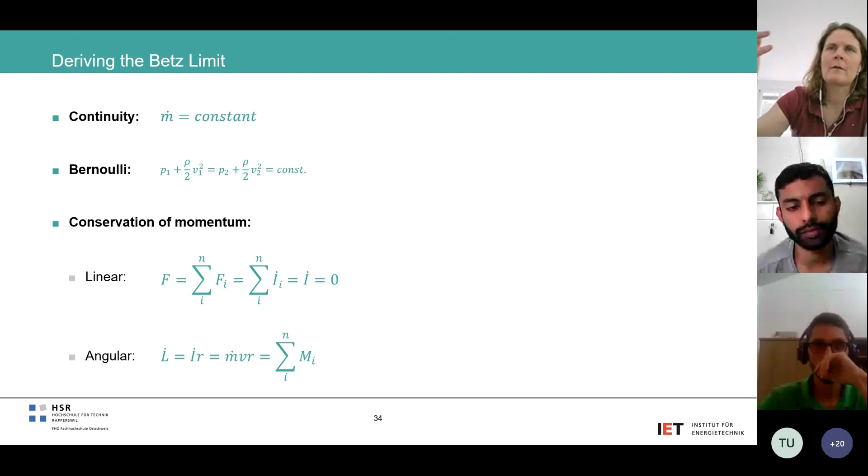And then you also apply the conservation of momentum, which says that the sum of the forces acting on a system add up to 0 linearly and angularly. You then imagine the flow going over a wind turbine, and you end up being able to derive some formulas from it. And I can share some documents where that derivation is actually done. I don't have time to do it really now.

But basically, if you want to think about the air going into the wind turbine, it's expanding. And the reason it's expanding is because you're taking energy away. If you're taking energy away, it means that the wind speed is reducing. So in order to keep the mass flow the same, you have to increase the area, and then you get this wake behind. So if you think about the wind speed going over the rotor, you basically get this drop, and at some point, about 10 diameters behind, it goes back up to the free stream conditions.

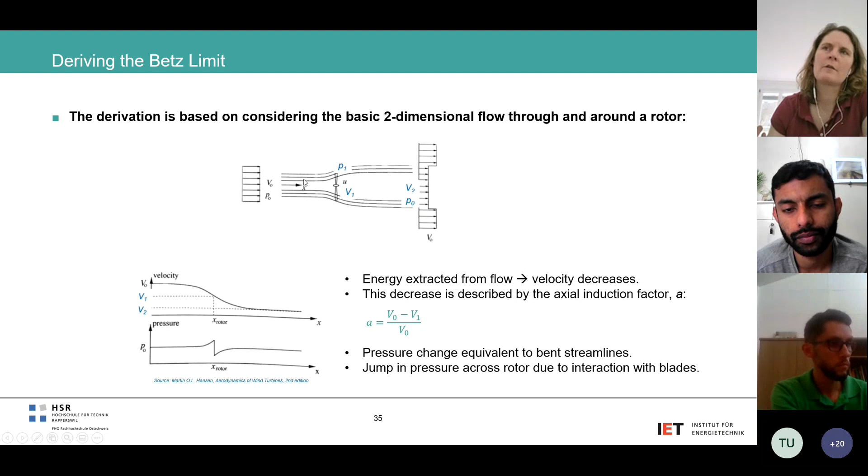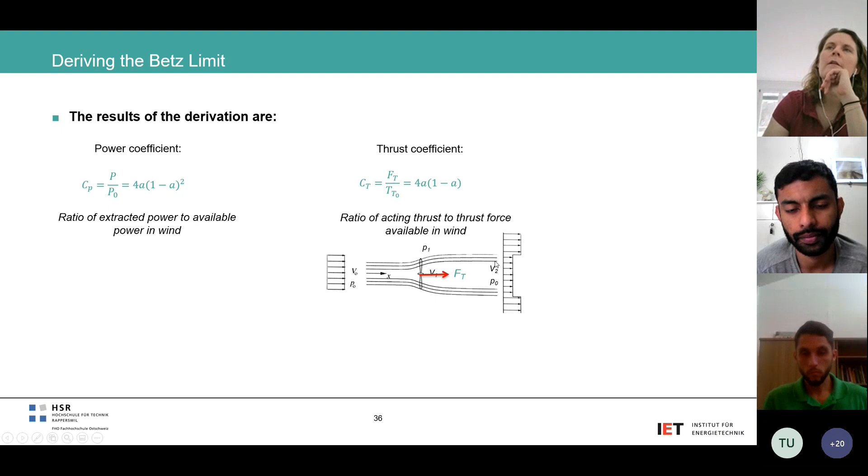You have this thing called the axial induction factor, which is what wind speed you have at the rotor compared to what you had at the beginning. So it's telling you how much you're taking out of the flow, basically. And then you get some equations, which we won't go into now, but you basically find out that the power that you can extract relative to how much is available is only dependent upon this induction factor. And the same with the thrust. The thrust is just the force acting in the flow direction on the wind turbine. It's related just to the induction factor.

So then you can plot this in a graph, and you see that the power coefficient and the thrust coefficient have a peak at a certain point. And so 0.6 is the peak in the power coefficient, and it happens at an induction factor of about 1/3, and that's basically the maximum amount of mechanical power that you can ever take from the wind if you had an ideal system, which you don't.

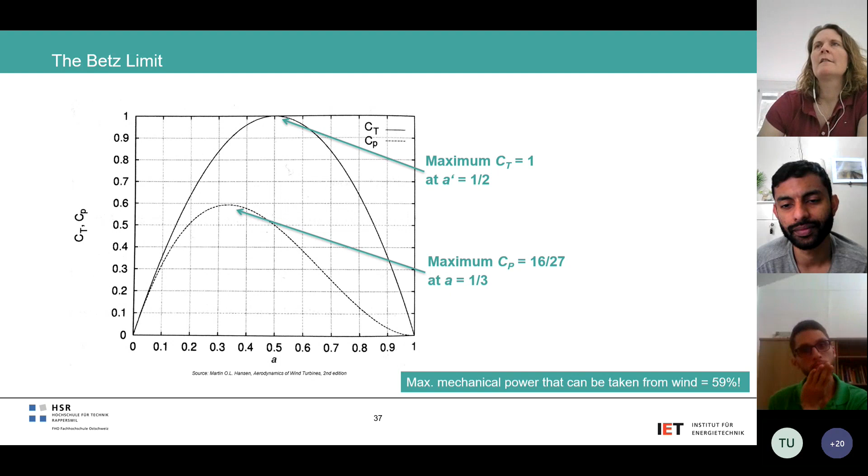So if anyone's interested in more details about that, let me know. I can put some stuff in the shared folder as well quite easily, because I lecture on that quite a lot. Actually, that value is 16 divided by 27, which is 0.59 something. The CT maximum is actually 1 at an induction factor of half.

And then we've said before that this wind turbine is actually a rotating thing, and the aerodynamic forces, the lift and the drag, which are created on the airfoil sections, create torque in the direction of the rotation, and they create a thrust in the direction of the wind. And so that transfers to power of the wind turbine and also the loads acting on the tower.

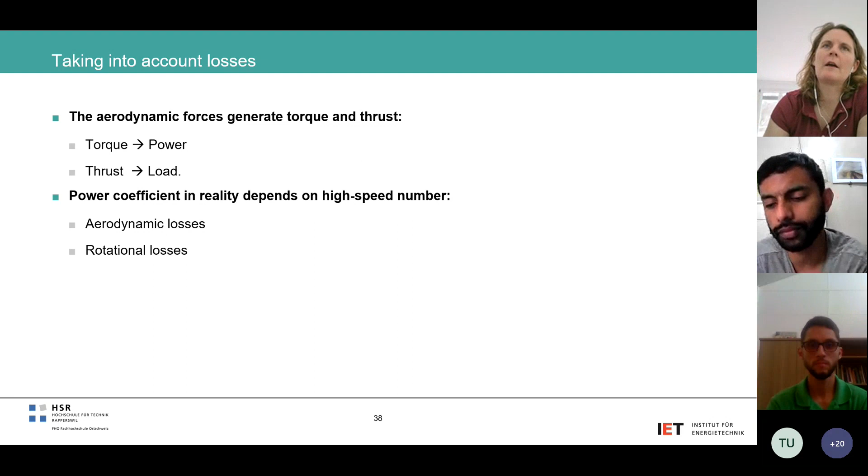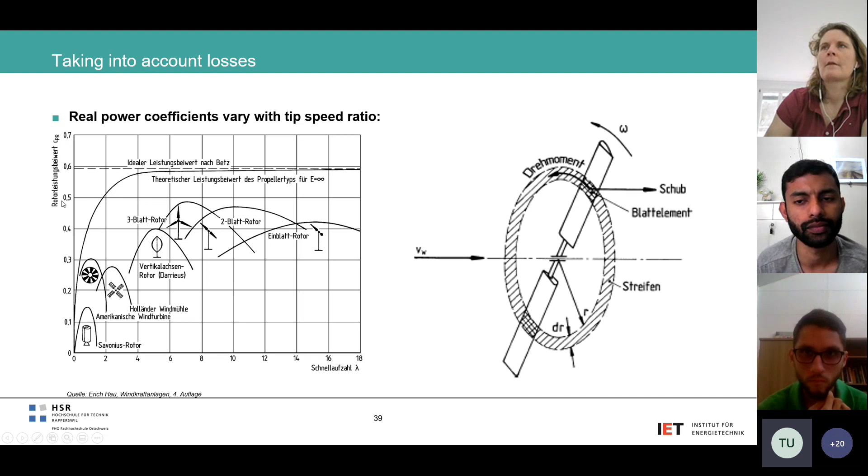Sorry, about once an hour my internet connection breaks for about 5 seconds. Can you hear me now again? Yes. You can hear me properly? Yes. All right. Good. Sorry.

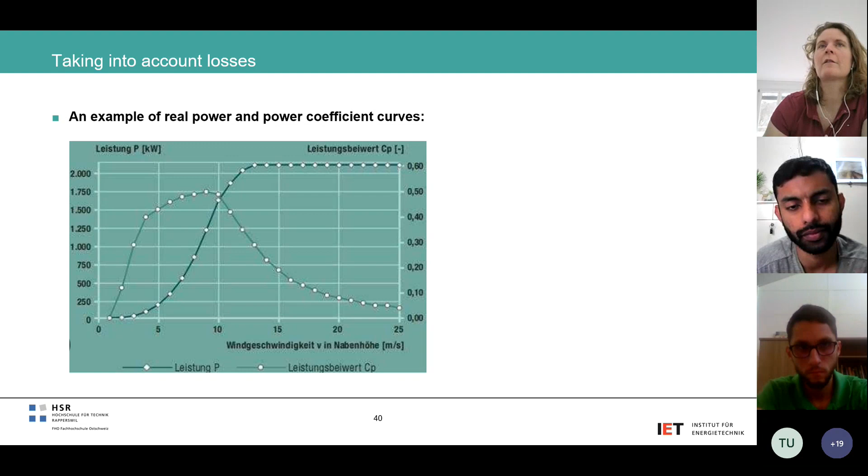And yeah, when you buy a wind turbine, you basically get given these curves, and these curves you use to calculate the expected annual energy production, which is the next topic of the lecture, and also it's the last topic, and it's also the topic that we're going to do the exercise on. So if you want to save your attention, pay attention now.

So the annual energy production is something that's pretty important for wind energy planning. If you're doing a site suitability study, maybe you're looking on a wind atlas, freely available on the internet, there are some global atlases, and there's also some national ones, which roughly tell you what the frequency distribution is expected to be over a long time at certain locations. But it's not very highly resolved, it's quite inaccurate. I'm sure Yoshi will tell you more about it as well in his lecture.

But if you want to do a site suitability study, maybe you're planning a project, you usually use these rough values to start with. But also then as a next step, if you've actually got some projects planned, you might want to do some first estimations of the rate of return, and then just generally understanding what the wind resource is like at a planned location. You need this value.

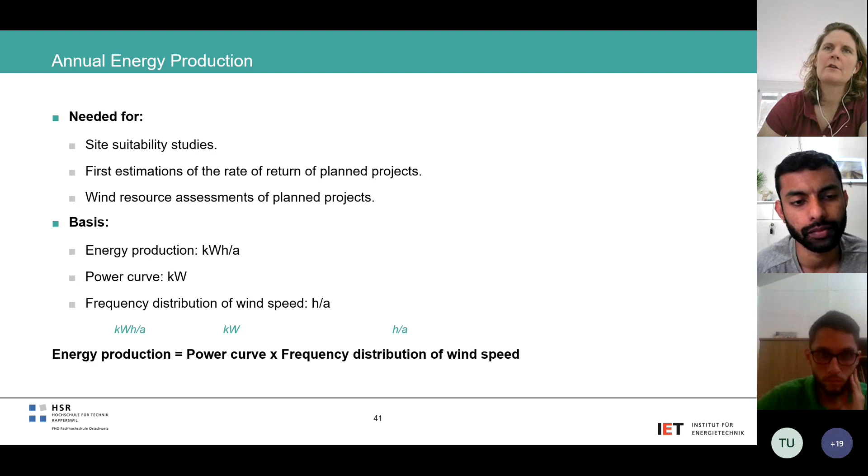And the annual energy production is energy, and it's measured in kilowatt hours per annum. The A just means per year. And yeah, just look at the units. So if you want to get kilowatt hours per year, you have to multiply kilowatts with the number of hours of the wind speed per year. It's actually quite simple. You're taking the power curve. So this is the power curve. We had this plot before where this power curve comes from.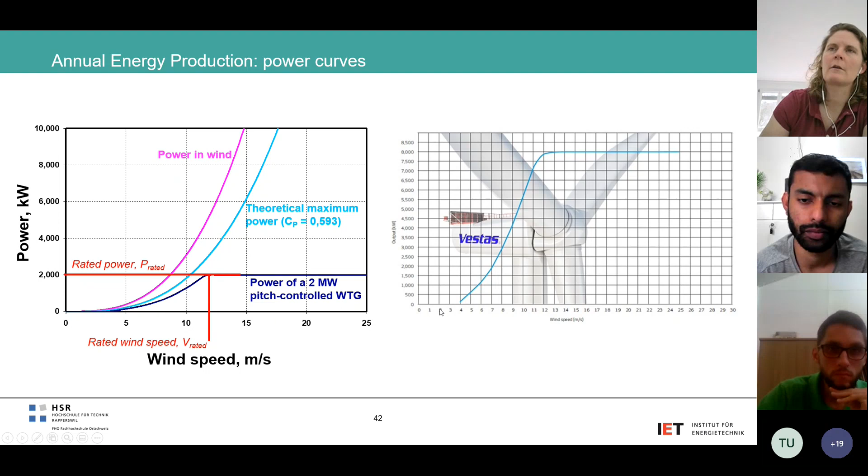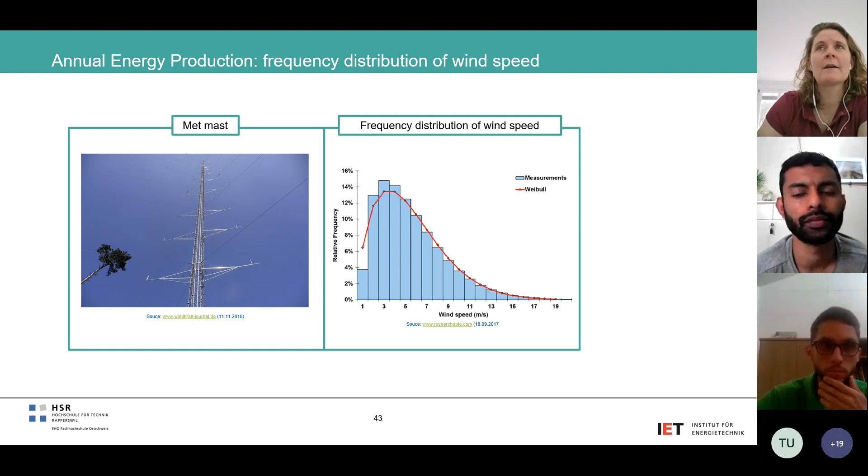And then the second thing you need is this frequency distribution, which you can get from an atlas, like I mentioned, but you can also get it from a measurement on site, right? You get a met mast and you measure, for example, for a year, and then you have this frequency distribution. And then you can convert that to energy as follows, and this is the step that you're going to do in the exercise.

So what you do is for each wind speed, you say, okay, what's the power? So for example, at 10 meters per second, you expect 4 megawatts. You then multiply that by how often you have wind at that wind speed. So in this example, 4% of the time you have 10 meters per second. So you literally multiply 4% by 4 megawatts.

You then multiply it by the total number of hours in a year, which is 365 times 24, approximately. And then for that wind speed, you see, okay, I have 1,423 kilowatt hours per year. And that's the energy yield for that 10 meters per second bin or class.

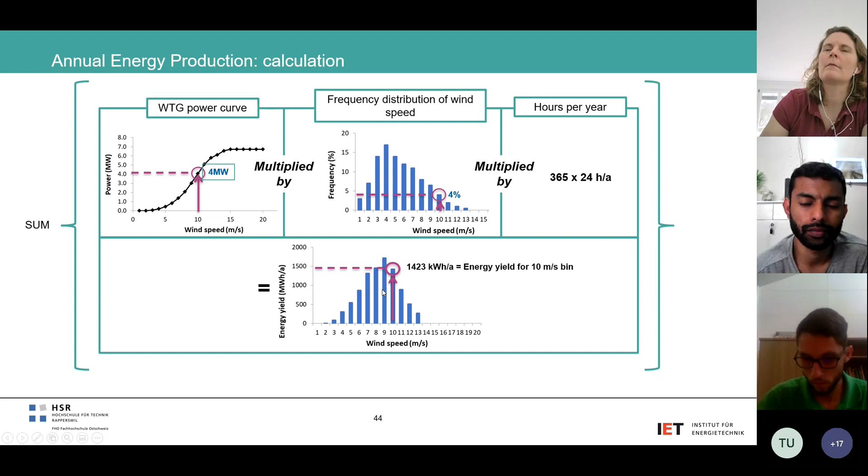And then you do the same thing for each wind speed bin, and then you can plot the energy yield for each bin, and then you can add it up, and then you get the annual energy yield. And a few extra things to that, which you're also going to calculate.

There's this thing called full load hours, which is usually used in other industries of electricity production. So full load hours is the number of hours per year the wind turbine would have to operate at rated power in order to produce that value. So you take the annual energy production that you've calculated and you just divide it by the rated power. And a typical value for a wind turbine would be 1,500 to 3,000. Well, actually, the big turbines are going to 4,000 now.

And you can also turn that into a capacity factor, which might be something you've heard of. And actually, the capacity factor is just the annual energy yield compared to the theoretical maximum. But it's actually a really stupid definition, because the theoretical maximum is defined as, imagine this wind turbine was running at rated every single hour in the year. And we know that this is impossible. We know that the wind speed is changing all the time, and it's not very often at rated. And it's actually the full load hours divided by the hours in 1 year.

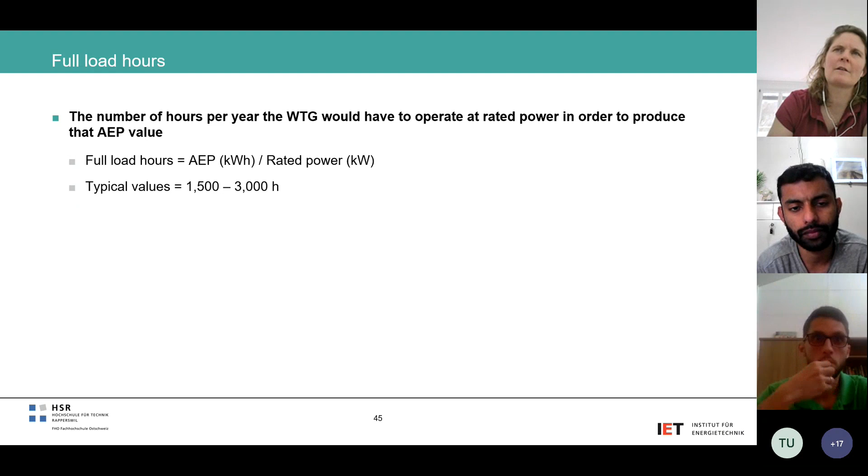So for example, you see this 3,000, if it was 4,000, you would know the capacity factor is roughly 50%, because you know there's like 8,000 something hours in a year. So in wind energy, it's usually 30, 40, up to maximum 50%. And it's really important to know that, I said before, this is kind of stupid. It's not a good idea to compare the capacity factor of a wind farm with a traditional power plant, because a traditional power plant is either on or off. Its capacity factor is like 90%, because sometimes it's being repaired, but otherwise it's running at maximum.

So if you compare a traditional power plant with a wind farm, the wind farm will always look bad. And I've heard people tell me, wind is bad because the capacity factor is low. And it just doesn't make any sense at all. It doesn't mean it's bad, because the wind is not blowing at 12 meters per second all the time. So you have to be really careful with comparing capacity factors.

My advice is, between different power production devices, just compare costs. Just compare levelized costs of electricity. Don't compare capacity factors. But it's okay to compare between wind projects if you want to know which wind project is better than another one.

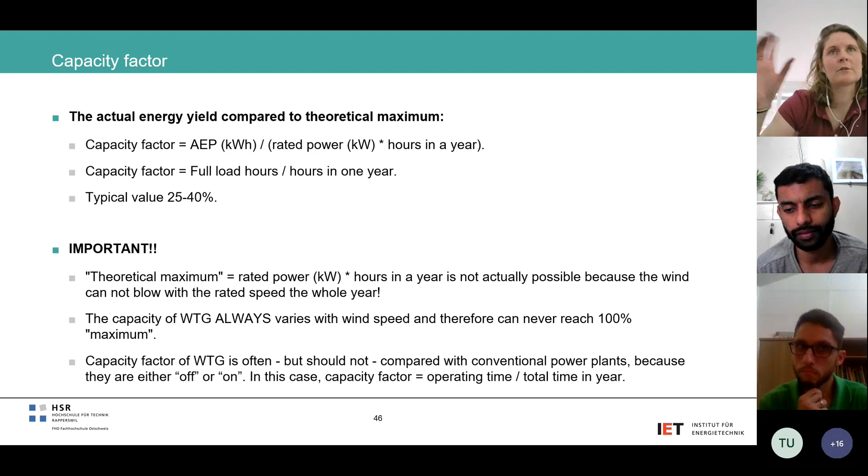The best way to explain this is, imagine you have 3% downtime, so 3% of the time it's not operating. Imagine in these 3% of the time there's no wind. How much energy would you be losing? You'd be losing no energy because there's no wind. And then the energetic availability would be 100%. It's actually possible to plan this 3% of the time when there's no wind, and then you actually get 100% energetic availability and not 97%.

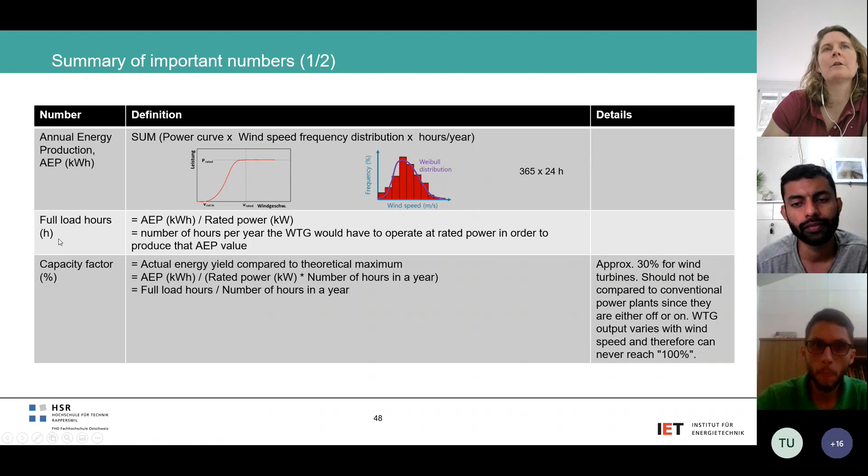And then this is just showing a summary of the annual energy production, the full load hours, and the capacity factor. And then we've finished. So I would go on to the exercise unless somebody wants to ask something.

First thing I'm going to do while I'm just waiting for you to think if you want to ask some questions, I'm just going to copy the lecture into the folder so you can use it when you're doing the exercise. Day 1, session 2. So I'm just going to put it in there under lecture notes. So it should be uploaded in a second. Let me just, yeah.

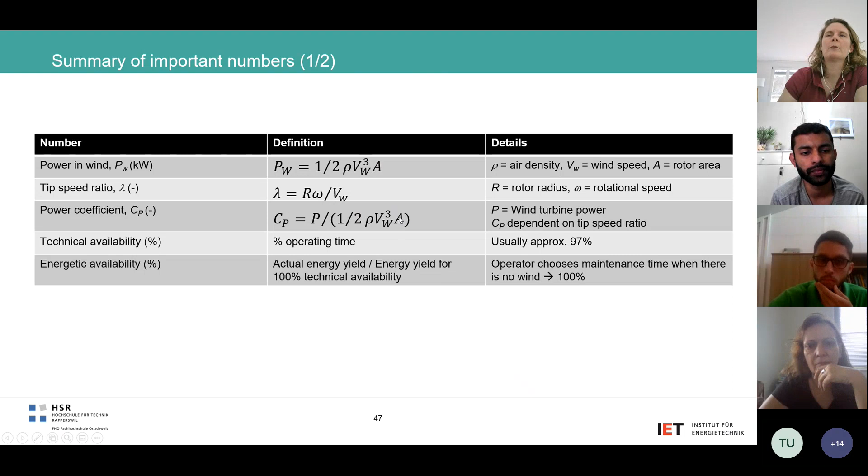The first part of the exercise is to calculate the power coefficient using the equation: power divided by half rho v cubed A. You've actually got all the information. One tip, the drivetrain efficiency I forgot to mention: usually the overall CP is just the drivetrain efficiency multiplied by the rotor CP. So you need to include the 95%, multiplying the CP by 95% as well. I can put that into the PowerPoint when I've stopped talking.

That's the first task. For the second task, I'd advise you to start doing it in Excel from the beginning. Part B is to calculate the power based on the CP at these different wind speeds. So you copy the equation for power and do it for all the different columns up to 14 meters a second. Part C is that above rated wind speed, the power stays the same.

This is actually giving you the answer to the first part of the question, by the way, if anyone wants some help. You have to calculate the CP backwards using those powers, because the power stays constant and the CP then reduces.

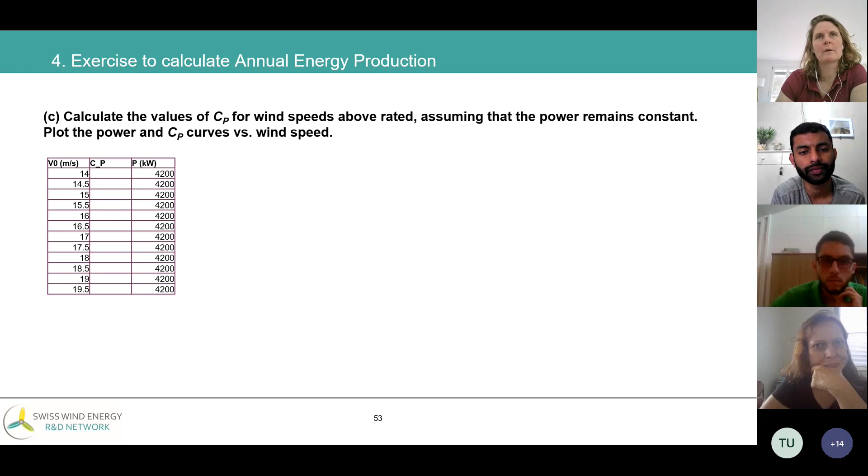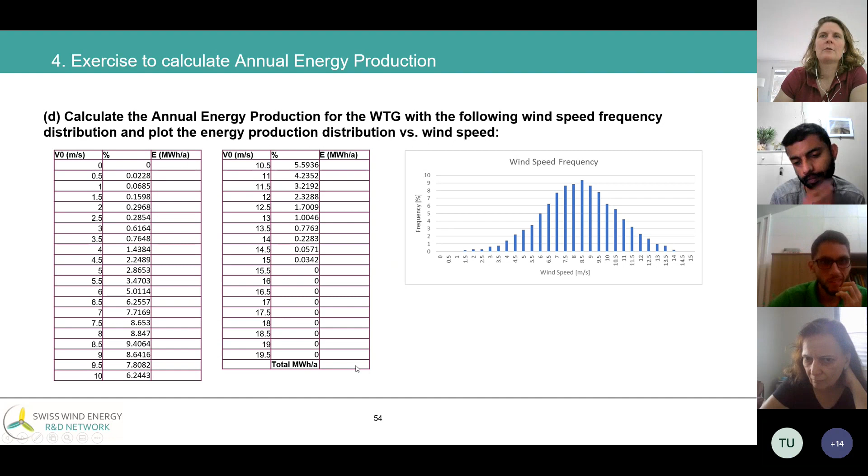The fourth part is that I've given you a wind speed distribution table, which you can copy into Excel. It shows what percentage of the time you have each wind speed. For each of these bins, you can then calculate the energy using the power curve and the frequency distribution. Then you add it up to get one value, and calculate the capacity factor and the full load hours. I do have the solutions in the presentation as well, so you can cheat if you want, but try to do it yourself and let me know if you need something.